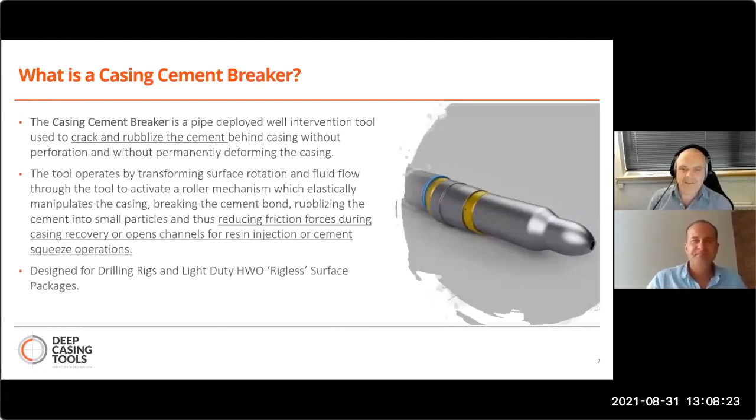Moving on to some of the benefits of where we see this fitting into the plug and abandonment space: certainly to increase the length of cut and pull segments, reducing the number of cut and pull BHAs being run in and out of the wellbore, enabling more predictable, more efficient P&A slot recovery operations. A lot of time is currently spent on section milling operations.

Every well is different, and there's no silver bullet to P&A, but there's an extensive reliance on section milling and pilot milling operations, particularly in the North Sea, Norway, and the UK. We hope to offer an alternative solution to turn wells which could perhaps be assigned as only solvable by section milling, to enable them to be abandoned with a cut and pull approach instead - eliminating the time, risk, and swarf generated with milling operations.

We see scope for the tool to improve the wash cycle of perf and wash cement operations. Great technology - we all want to leave casing in situ if we can. I think perf and wash is going to get us there, but where it's perhaps not performing as well as it could be is in the wash component of that application, particularly in wells with cement stringers, patchy cement, all the way up to heavily to fully cemented applications.

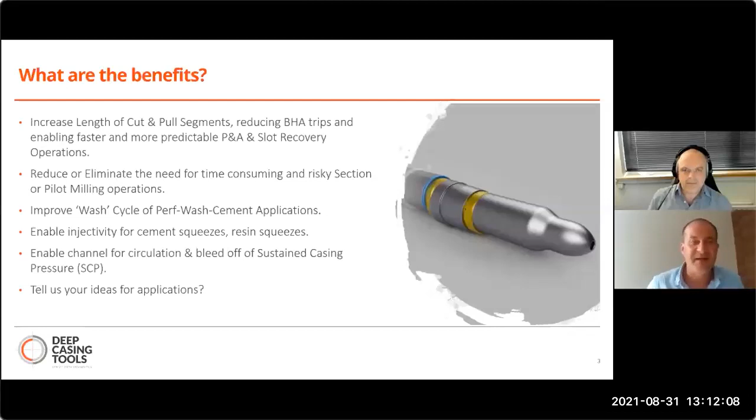Here's how the tool operates mechanically. As mentioned, we'll deploy the tool in hole. At the moment it's designed for standalone deployment, but we believe in the capability of combining this tool with a cut and pull BHA or a perf wash cement BHA in future. For now, as we commercialize the technology, we're looking for a simple standalone cement breaker run. Once we're at depth, we would pump choke back pressure through a nozzle in the nose, which drives the active roller outwards. Then we commence radial operation with rotation from surface.

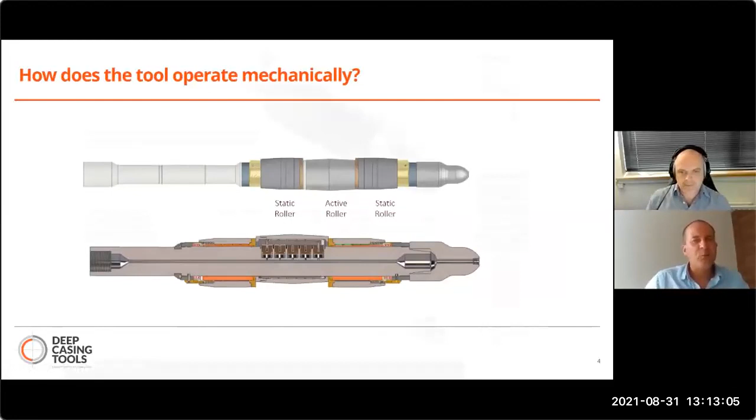We're well advanced in our commercialization of this technology. This tool has a field run - we ran it successfully in 2019 with Equinor on the Huldra field, successfully reducing the pull forces required to pull a segment of heavily cemented casing. It's a fantastic case history to kick things off with, using a generation 1 prototype of the tool.

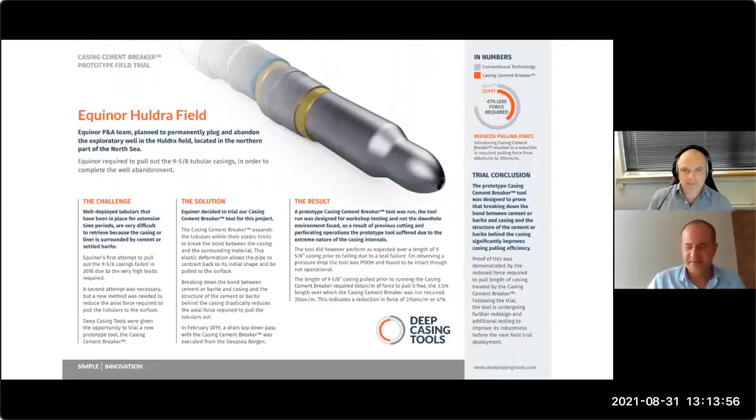We've had a goal over the past 2 years to make generational improvements on the tool so it can function for an extended period of time. Hence the 20-hour endurance testing which the tool has completed - I'll leave Alan to provide a summary of that. But prior to the first Huldra trial with the Generation 1 tool, we carried out pull force reduction testing to validate that post treatment, post pass of the cement breaker, we're able to reduce pull forces.

And we've certainly done that on every sample we've tested - in some cases up to 90% pull force reduction of cemented casing samples.

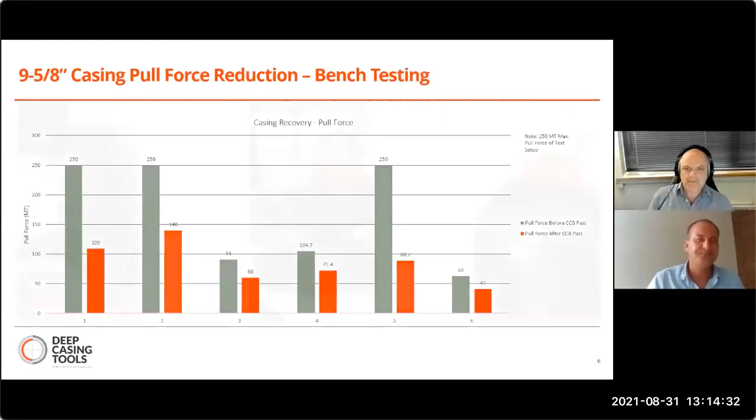So here we have a video of our endurance testing - you might have picked this up on LinkedIn a couple of weeks back too. Alan, I'm going to hand off to you to give us a short summary of the latest endurance testing whilst we let this video play here. Over to you, Alan.

Thanks, Ed. One of the biggest questions raised by potential clients was, obviously, how long will the tool be able to operate for? They set a target to achieve, which was a minimum of 500 feet. Obviously with the 20 hours running test, it certainly proved the tool's durability, which is something we were looking to prove to potential clients. Being a prototype, it's a new tool, and obviously getting a trial - these were very important questions that clients had come to us with.

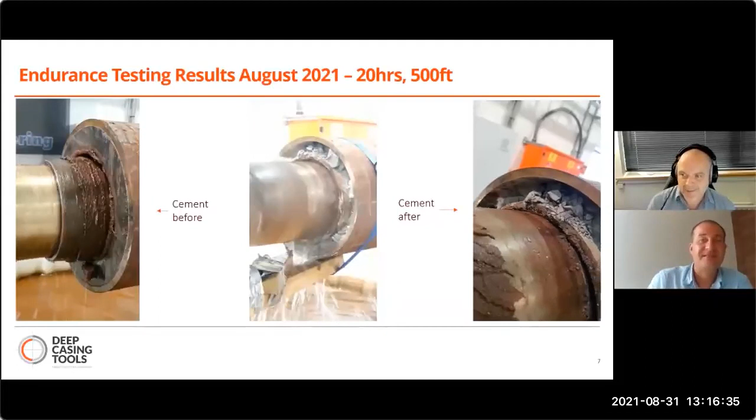Fantastic, Alan. So one of the key goals here - and I'll let you speak again a little - is that we wanted a firm set of operating parameters going into our next generation of field trials. A couple of things stand out for me: the operating pressure, torque, and the force required to pull the tool through the casing while it's being activated. They're all quite manageable, certainly for a typical North Sea rig, but also for perhaps hydraulic workover unit operations too.

Yeah Ed, that's actually a very good point, because with Generation 2, we've certainly reduced the torque and overpull on this model. That was specifically designed over this past year. We've had a lot of inquiries about whether it can be run from a HWO unit that may not have the same rig capability as a rig in the North Sea with a derrick and top drive. So we've adjusted based on client feedback, and with this tool we've now got it into a manageable situation for not only workover units you might get on land and offshore, but also a big rig, a standard in the North Sea. We're pretty happy with what we've managed to do over the past year. A lot of work, but we got there.

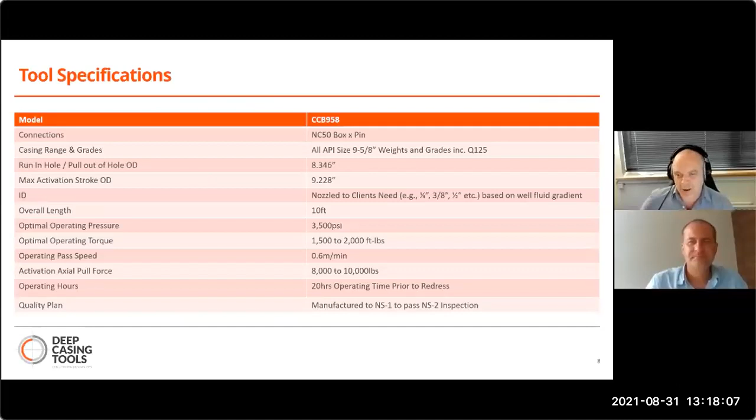Bang on, Alan. I'm just going to draw the conversation back to a net zero goal. Here's a slide to show the CO2 emission savings we believe we could deliver from a typical project. If we can enable a cut and pull operation as opposed to a lengthy section milling or pilot milling operation, that could result in as much as 10 days of rig time savings. Some of these numbers come from internet sources on the daily emissions of a North Sea semi-submersible rig. We could help contribute to as much as 300 metric tons of CO2 emissions saved per project, per job.

That's really a target we could all get behind, eh Alan? Absolutely Ed, and it's a typical saving of 10 days. Having been on the rig floor myself for a lot of days cutting and pulling casing, sometimes if the CBL log hasn't been accurate, it's guesswork, and you could have multiple trips in and out of the hole, which adds to the metric tons of emissions produced per operation. We do need to look at reducing that.

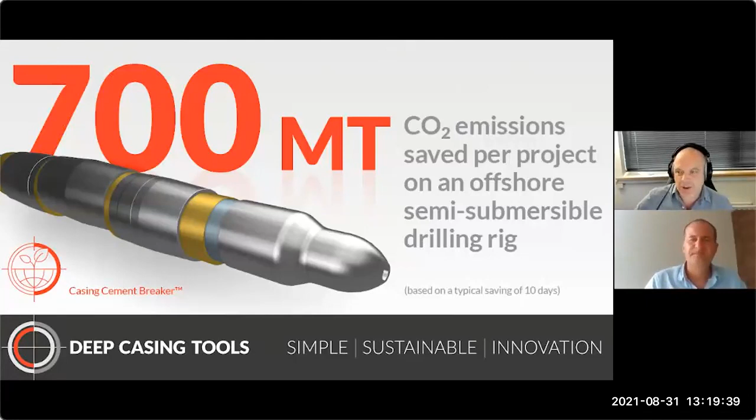So final slide, guys, just to let you know where we're at. We've completed our endurance testing. As Alan mentioned, we have a primary and backup tool being assembled over the next couple of weeks to be ready for field trials in September. We welcome all inquiries, so let us know how and if you could be part of our adventure.

I'll hand back to you for final words, Alan, on your hopes and goals for the next couple of months for the technology. Thanks Ed. Certainly I would like to see the technology get offshored and into a well to prove its worth. We're firmly behind this technology, having experience of cutting and pulling casing myself. I've no doubt it's definitely going to bring a benefit.

If you're out there, perhaps even on an existing operation just now, and you have small sections that have been cut into even smaller sections and you want to try this tool to see if it can aid your operation, we are available 24 hours a day, 7 days a week, and we can mobilize these tools to you. So maybe that's something to think about. If you've got an operation where you'd like to see these tools offshore, get in touch with us. We'd like to be involved in the planning stage as early as possible so we can give you our experience and advice.